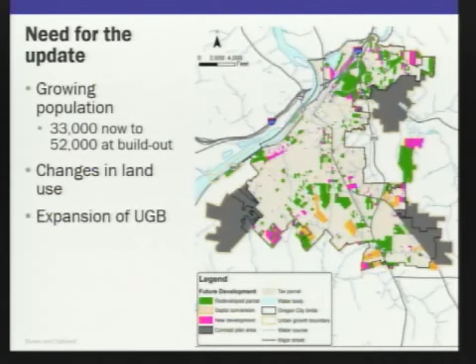So we've done a lot through the process. We did a lot of flow monitoring. We had 12 flow meters. We looked at pump station flow data at 6 of our largest pump stations. As I mentioned before, our previous model was a spreadsheet model, which was accurate, but definitely not as robust as what we have now.

We did a lot of work to calibrate that hydraulic model, and I say we, it was really Brown and Caldwell. We looked at a lot of data, a lot of maps, a lot of comp plan data, a lot of existing development data, and we incorporated all that into that model. So while most of our problems are related to wet weather, we incorporated all those features into the hydraulic model, and it's all outlined in the master plan as to how all those numbers affect some of our flows. We've got detailed cost analysis in our master plan, and we'll share some of that with you.

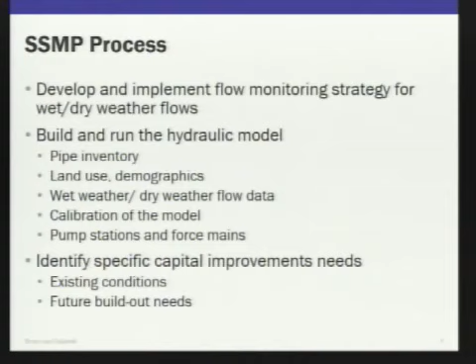And we've definitely made some assumptions based on how we should manage the program with regard to reduction of infiltration and inflow, which is rainwater that gets into the sanitary system. We are a separated system, so we've got a stormwater system that collects stormwater, and we've got a sanitary system that collects sanitary. And so we shouldn't see such high flows, but because we've got leaks in a lot of our pipes, we tend to see that inflow and infiltration make its way to the sanitary sewer system, and when that happens, it fills up, and in some cases overflows.

All right, so setting a design standard is kind of like not taking on more than you can actually accomplish. So you could set a really high design standard and then find out that the capital improvements associated with trying to reach that are much more than you can support, or you can set them relatively low. DEQ has a 5-year, 24-hour storm event, and that is the size of the storm. Really, that's 3 inches of rainfall in a 24-hour period. That's the minimum that DEQ requires us to do.

We looked at that storm, but we early on established that the 10-year, 24-hour storm event is what we should really be targeting for solutions and fixes. So we started looking strictly at the 10-year, and then we saw some of the results of that, and asked Brown and Caldwell to look at the 5-year, 24-hour storm event and see where the differences were. There weren't huge differences. But there were some differences.

We also looked at existing conditions, so where we are today, assuming no future build out, and then really the ultimate build for Oregon City is future flow conditions. We definitely don't want to underbuild our sanitary sewer system and not look to the future. So we think that's a conservative but not too conservative approach. Other communities are definitely more conservative. There are some communities that look at a larger storm event for their design of sanitary sewer system. So we don't think we're too high with that.

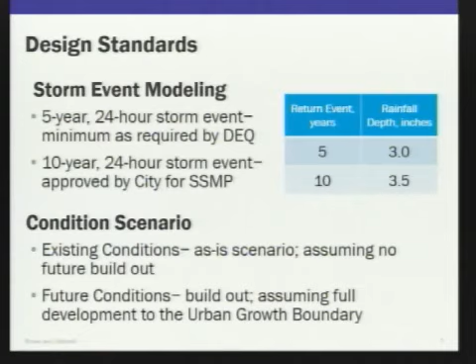Okay. I'm going to go ahead and turn this over to Jim. It says, "Don't blame the messenger," but I think we didn't really confirm that we had a problem until we hired Jim, and so I kind of wonder if maybe. So it is your fault then. Yeah, I guess it is my fault.

Well, thank you, John. So I want to start off talking about the results of the modeling, and we'll turn here to a map that shows some of the problem areas that we've found based on the 10-year future condition scenario. So again, it's the 10-year storm. That storm is what we identify as establishing the level of service.

That's what we want to provide in terms of sewer capacity for the city under that event. And it's basically twice the 1 in 5 year storm, which is the bare minimum that DEQ allows. So it's a good fit, I think, for the community.

And as John indicated, when we look at the problem areas and we looked at the 5-year storm versus the 10, there are a few more challenges or a few more problems with the 10, but really not that many. So when you build to the 10, you're really getting a lot more benefit for your dollar. Such as? Pardon me?

Such as? Well, we looked at the total numbers, the cost for doing the improvements for the 10-year event, and I think we'll show the numbers here in a few minutes, but the master plan shows for upsizing pipes, upsizing pump stations, about $5 million. And I don't have the number in my head exactly, but I think it's maybe $4 to $4.25 million if you design to the 5-year storm rather than the 10.

So for that difference, you buy a whole lot more capacity and satisfaction. We can look at the exact numbers. I don't have those with me. So let's take a look at where we see surcharging and flooding, based on that 10-year modeling.

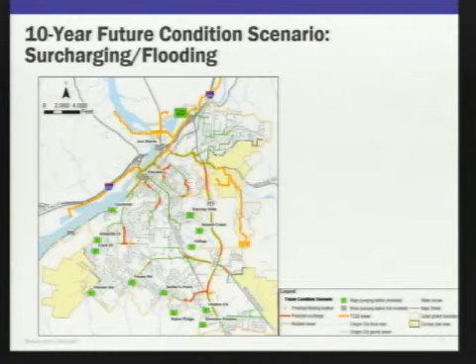Now again, this is under the future condition. This is with a full build out to the extent that's possible. So we see the flooding in a couple different areas: Hazelwood area, Linn Avenue, and down in the Settlers Division. We don't have the names on them.

Surcharging down around the Settlers Point pump station and the sewer before it connects to the Tri-City Service District sewer and Highway 213. So these are the problem areas. This next figure shows you where we've defined projects.

And if you were looking at the master plan at these two figures, because they're directly out of the master plan, you'd note that the projects are not always as large as the problem areas, because when we fix some sewers, it sometimes alleviates the upstream problem. So if we can put a bigger pipe in at a certain location, the surcharging that we were seeing upstream of that really goes away.

So this shows the northern half of the city, and you'll see again we've named some projects: the 12th Street, Linn Avenue, Division, and 13th Street, a small project up on Holcomb Boulevard, and hopefully I can say it correctly, the Canemah Pump Station upgrades there.

What you also see here are the blue lines, which we're calling sewer extensions. And these are sewers that we've identified that would need to be constructed to provide service to areas that do not currently have service. So in this case, for example, the Park Place, you see quite a few of the sewers. That would be to put sewers out into that concept area so that they could develop.

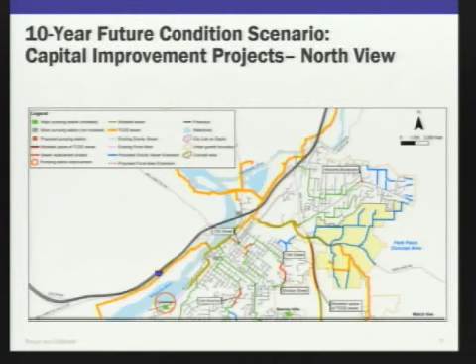And then other areas in the sewer, inside the city limits, where there just isn't sewer service currently. In some of the areas, that'll be to provide sewer service to where there are currently septic systems, because unfortunately, at some point in time, those septic systems will fail, and at that point in time, they'll need a sewer to connect to. We see more of those.

Could I stop you there a minute? Sure. And maybe you're coming to this, where we see those areas that are currently not in the urban growth boundary, the blue lines that you're indicating. I presume that future development will be taking care of some of that, but it has to be planned for. Is that right? It does need to be planned for, and in terms of who pays for it, those projects will, we've talked about how that division would be broken out, but basically they'll either be paid for through system development charges or directly by the development itself.

Remember those blue lines, because I'm going to come back to that. Okay. So those blue lines, we've got some decisions to make about how they should be funded. At least the city commission does.

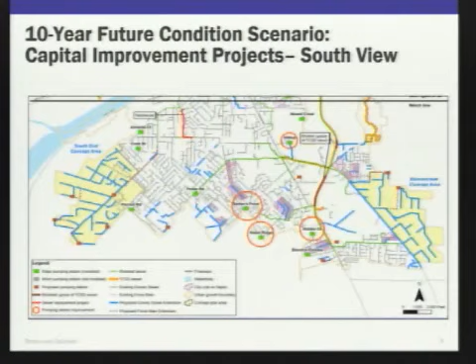Remember that. So in the southern half of the modeling in this figure, again, we have a couple projects identified. I think in a previous presentation we talked about Hazelwood, that area. And again, several more pump stations. There's 4 shown here: Hilltop, Settlers Point, Noble Ridge, and Hidden Creek, that will need upgrades so that they can convey that future flow. On this side of the city, you've got the Beaver Creek concept area as well as the South End concept area. Extensive pipe system required there, with particularly on South End the need for a number of pump stations to get the flow up out of those low areas and back up to a gravity sewer.

You can see on this side of the city that the hatched area, that's kind of a purplish hatch line, those are areas that are currently on septic, that I was mentioning earlier, that at some point in time may need to go onto the sewer system. Which ones are those? Oh, the purple? The purple lines where they're all grouped together. They're currently on septic? They're on septic systems, yes. Right there above Settlers Point's a good example of that. These here, I know. That's a lot. Yes, there are a fair number throughout the city's boundary.

Commissioner Roth? I had a question. I'm seeing these names on the map, so I'll ask it now. Areas like Noble Ridge and Settlers Point seem to be very new to be having this type of a problem. And I'm wondering, why was the development allowed the way it is, so that it needs to be upgraded? And have we done anything to change the calculations so this won't happen to us again?

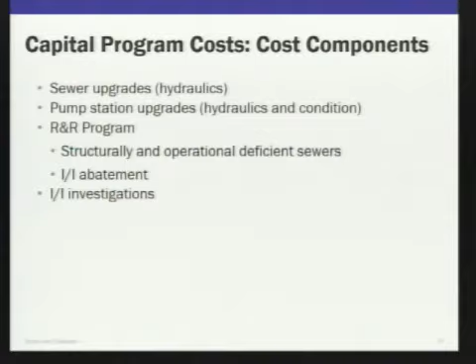Some of these sewers are not in great condition, and the city's closed-circuit television inspection program, where they go out and look at the sewers and evaluate the grade of those sewers, helps give us that information. So we have evaluated the inspection results that have been performed to date to identify a program to put money back into a capital program that will either rehabilitate or replace sanitary sewers that are structurally or operationally deficient. So you're basically reinvesting in those sewers that are starting to show their age. So that's part of the R&R program.

Another part of that, and John has also mentioned or alluded to, because of the condition of the pipes, a number of the sewers see a high amount of I&I, or inflow and infiltration, coming into them, and often I&I far overwhelms the amount of base sanitary flow that we see. We talk about wet weather and dry weather flows. Well, we often see, and our flow monitoring has shown this, that our wet weather flows can be anywhere from 5 to 8 or to 9 times the amount of the dry weather flows. And it's all from water, rainwater, groundwater getting into the sewers when they shouldn't. So the focus here as part of the R&R program is to help take care of those sewers in terms of sealing them up or repairing those sewers so we can restore hydraulic capacity back to them.

Jim, yes. In your modeling, have you identified the locations where the most significant leaks are occurring? We have, in a very, let's say, general way. We installed 12 flow meters throughout the city. And generally, we install those towards the bottom of the basins. And then in addition to what we get from the flow monitors, we had pump station data, which gave us even more information on the system. So we have a pretty good idea of where the worst basins are throughout the city.

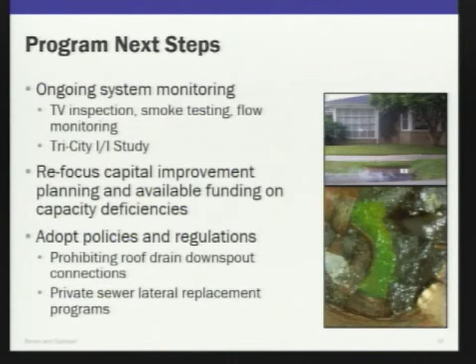We just talked about adoption of particular policies. Should we prohibit roof drains from being connected to the sanitary system? We are a separated system. We weren't always a separated system. So there are places in town where we separated the main pipes, but the private laterals, not so much. Private lateral sewer replacement program, again, we need to address that. We need to come up with those policies and regulations to figure out what the city really wants to do.

I do want to acknowledge a couple things. This master plan update, looking at rates, looking at capital programs, looking at how to allocate those costs, that's been a group effort. We've gotten a lot of support from our finance department, our community development department, Brown and Caldwell, obviously, Public Works. Our legal team is helping us now with the moratorium. This is just a very big effort.

The culmination of that comes down to the rates, and I know there's a lot of interest in, okay, so what does this mean for rates? I think, as Jim referred to, there's good news there. It could be a lot worse, but giving you a specific number is something we're going to work towards on August 12th. I think that's a work session. Yeah, work session. So I expect you all to be there for that, even though it's a city commission meeting. Even some of you planning commissioners might be interested in that.

And I mentioned our legal team. They've been helping us through the legislative approval process of this thing, and Tony and his group have been very good. So we're going to move through several planning commission and city commission meetings to get this thing adopted and in place.

So again, I mentioned that August 12th meeting. I definitely don't want to spoil the surprise there, but a couple of things that I would say is our existing rates are not really aligned with our capital needs. So, like our other utilities, we're going to share with you some of those needs. The moratorium that we're talking about and the process of implementing that puts us in a compliance schedule that front loads some of the capital costs as opposed to spreading them over time. So that'll have an impact.

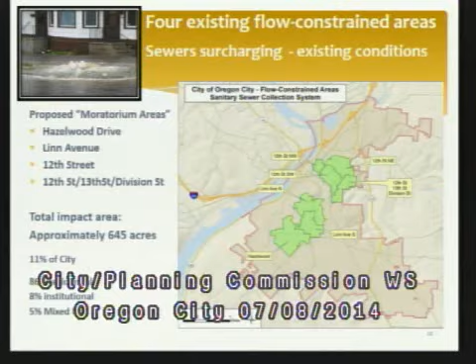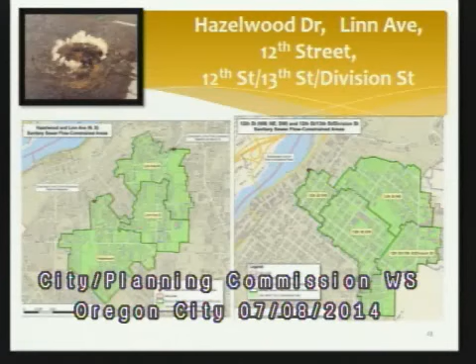Again, there's a little more detail. I know some of these are hard to read. We've got a lot of this information available online and in flyer format as well. And we'll be going over the sanitary sewer moratorium information at a couple other meetings, a meeting in July and in August. But this is all related to deficiencies during wet weather flows. Surcharging, as we've talked about, is in areas that are 5 feet or less from the ground elevation. So we know we've got some basement flooding problems in some of these areas.

If the problems aren't fixed, we're going to have spills, and that's definitely a state and federal violation. We know that the City Commission's proactive enough that they're pretty interested in seeing it resolved too, even though that's really state and federal regulation. So until the capacity problem's fixed, we're going to see surcharging and probably overflows. So we think it's a high priority. So how do we implement a fair and straightforward way? So this is our policy.

For land use applicants, we're notifying applicants that have come in. We're notifying them at the earliest opportunity that we can. We plan to process those and get them through our planning approval process. But we would leave them with a condition of approval that would say you can't really build anything until the capacity problem's been fixed. For building permits, we won't necessarily accept building applications. We're talking about a full home build, not additions like a kitchen or bathroom. We're going to let those go through, but no applications for a full home build on an existing lot.

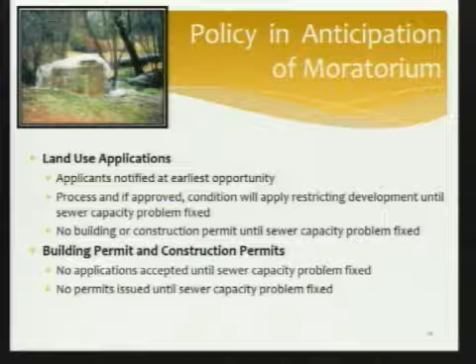No permit issued until sewer capacity. So same thing there. We just really don't want to see those building applications move forward until we fix the problem in that particular basin. One area includes the hospital, right? So will there be any restrictions on that? There will be. And so, that's the other piece about priorities. Where are our priorities as we move through the repair? It'd be nice to get those funded quickly and move forward in the most efficient way we can so we can get out from under this moratorium. So we're going to be talking a fair amount about that.

So John, one of the downsides of this is that, I know you're aware of this, land use permits have a limited shelf life. They don't last forever. So someone goes through the land use process, they have a 2-year period, we don't have the area fixed where they're in, and then what happens to their permit? It seems to me unfair that someone would have to go through the entire process all over again and pay additional fees. Yes. So I'm sure Tony has thought about this long and hard. Well, Tony and Alita and our legal team have thought about that. The way we've set up this policy is that land use approval would be held and granted until a year after the moratorium is lifted. So like a stay of some sort.

Right, like a stay of some sort. Okay. So, we definitely don't want to do that to our applicants and development community. We want to get them through. I suppose there is some risk if today's regulations change, so they've gotten approved through today's regulations, but tomorrow's change, and then they'll still have their approval. We won't necessarily go back and force them. I mean, if you don't have capacity, you don't have capacity, and there's not a whole lot you can do about that.

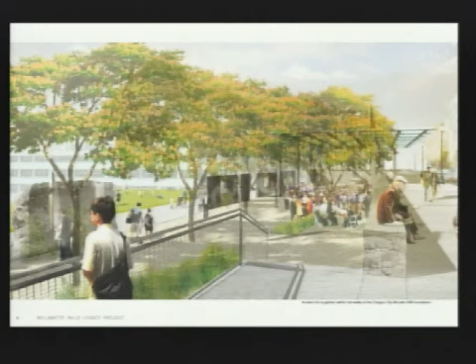Let's go ahead and fire through this. So I'm going to walk through this pretty quick. You've probably seen parts or some of these slides in presentations as we've gone through this process, and really this is a compilation of what we think is the best description of what's happened. So some of it has been brought forward from other presentations. It's really outlining the vision of what we want to see on the property, including not only the narrative component of it, but really the illustrative part of it, to try to capture what we heard from the public, what we've heard from the elected officials on what they want to see on the property.

The site characteristics, it's a very unique site. There are a lot of amenities there that we've kept hearing about should be incorporated in here, how we don't have to create this fake Main Street. We have the authentic Main Street right there. So how do these design features get incorporated into what happens there in the future, realizing that some of this is going to go away, but we can still incorporate those elements.

The 4 core values. These 4 core values have served us very well as we move through the process. Once again, just walking through what they are and the desired outcomes from those, whether it be for historical and cultural interpretation, public access, healthy habitats, and economic development. As we move through this process, the things that we've heard that we believe really represent those 4 core values. Acknowledging the work that we've done to date, beginning with preliminary investigations right after the property went bankrupt, through the master planning process, and then the partners' commitment.

It is still our goal. So like I said, these are going to move at 2 different paces. The land use document will move forward, and the strategic plan will move forward. They're not contingent upon one another, and our goal is to have the strategic plan adopted either by ordinance or resolution by all the partners to really show that commitment by each of these public agencies to this vision and the support for the direction that we're heading with it.

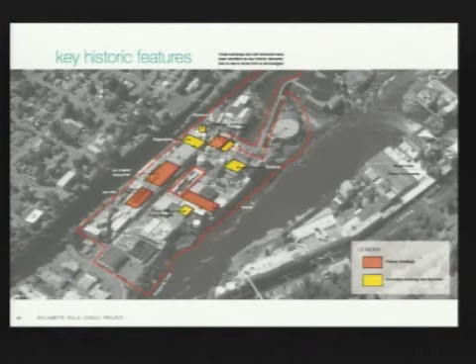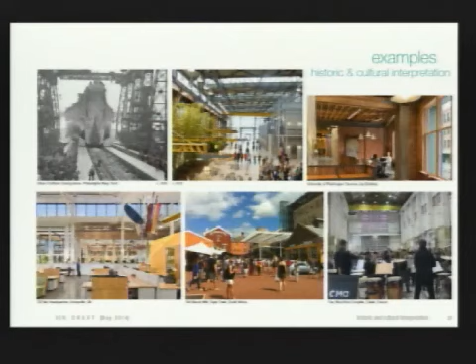There's the old flour mill foundation out there, the old basalt rock walls, the boilers, the digesters, the large sphere, Sputnik, everybody refers to when you walk through the site. So just putting those down into the strategic plan for future reference. And then some of the examples of other interpretive projects throughout the world that have been very, very successful, taking old industrial sites and incorporating them into very productive and very successful redevelopments.

The public access component, obviously one of the largest things that had the most support when we talked with the public. Getting folks back along the Willamette River and out to the falls was by far the most supported desire from the community. And as we've discussed with the partners group, the recommendation from the consultant team and the staff is that the catalytic project, the first step, we believe, should be the Riverwalk, providing that access back through the property, along the river, and out to the PGE Dam.

So we are currently negotiating, and we've been negotiating with PGE for a while. They're supportive on an access easement across the dam out to the falls, as well as we're currently negotiating with Mr. Heberling for a public access easement across the property that would get us from 99E out to the PGE Dam. We talked quite a lot about how do we access the site, the importance of not only vehicular but bike and ped access ways into the property, really integrating the site with Main Street so that it feels contiguous rather than a gated community at the end of our downtown.

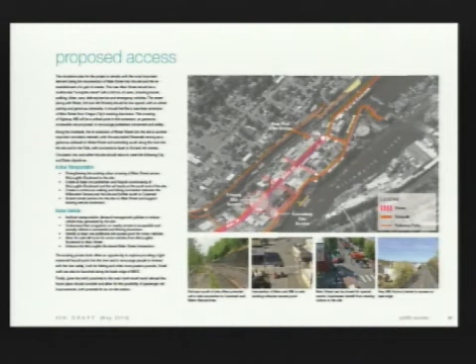And then identifying where secondary site access can occur coming off 99E into the new Water Street, as well as important ped and bike connections, both across 99E and the railroad tracks up to McLoughlin Promenade, and then continuing south along the rail spur towards Canemah and crossing 99 again to tie into the Canemah neighborhood up to the Children's Park into Canemah Bluffs, eventually down to Willamette Narrows. So it does open up significant miles of Willamette River frontage for bike and ped opportunities.

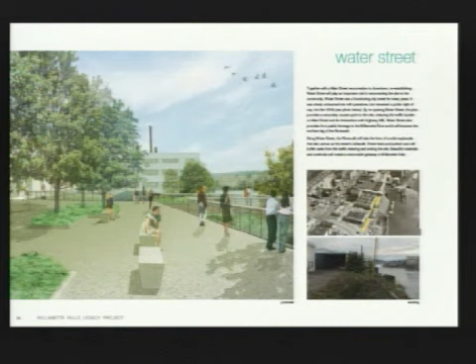Water Street, we think, is an important first step. This is coming right off 99E. We used to have Water Street there. It was platted. And so how do you reestablish that as part of the Riverwalk project? So once again, as we move through these, this is a living document. These are demonstrations. We still need to go through a public process in the final design and engineering, but this is really, we believe, capturing what we've heard as we've gone through this process so that this doesn't get lost if it does take us additional time to do this.

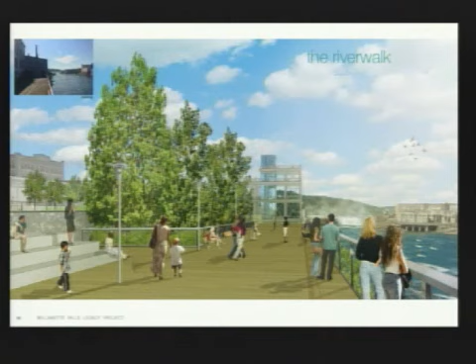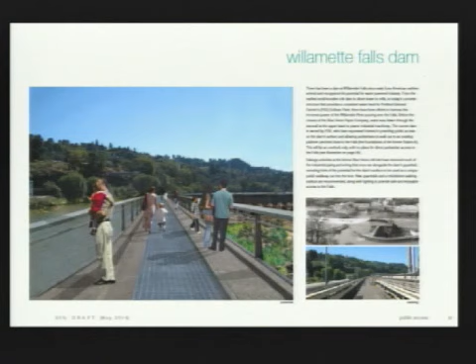And how can we incorporate, in the top of this one, you show the existing condition, and then in this example we're incorporating some of the Mill H infrastructure for public access and viewing. It's one option. It may or may not happen, but it is certainly something that could. And then out onto the PGE facility, most of you have seen this description of the public access while still incorporating the maintenance requirements of PGE to continue to operate that dam facility. Another example, many of you have seen this in Australia, of taking the old industrial oil refinery and storage tank and turning it into an absolutely beautiful public park that incorporates many of those industrial elements into its final design.

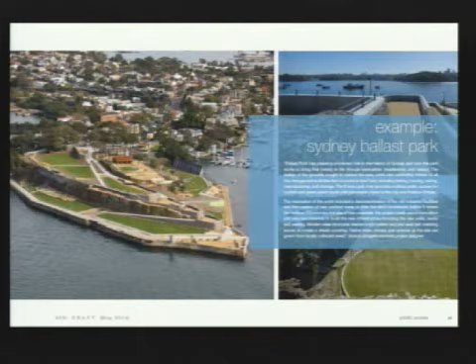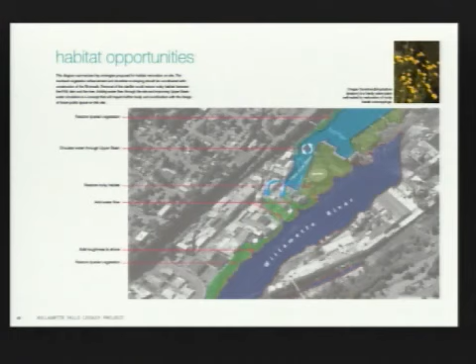The healthy habitat, you've heard a lot about the several climates that exist, the microclimates for habitat from the mist. So really focusing on riparian habitat, fish habitat, and then water quality. We see all those as opportunities with the redevelopment of this project. We've identified the areas where that can occur, both above the falls and below the falls on the site. And then the economic redevelopment potential, when we start to look at the redevelopment block. So essentially this is the one component that's going to be adopted as part of the land use document.

So in our discussion, since Mr. Heberling has purchased the property, I would like to point out block 4 on the map. So originally, we have changed this diagram in discussions with him. Originally, the yellow piece and Mill O, the Woolen Mill Foundation, used to come around almost like a little U here. Right. So if you recall out on the site, here's the PGE dam that you walk along, and then there's Mill H right here that you can walk straight into. So those foundations of Mill H are even with the dam.

And so in the discussions with Mr. Heberling it was, would there be an opportunity to potentially do something there, since it is much higher than the surrounding area. So we did propose to identify this as a potential redevelopment parcel, realizing that there is quite a bit more work that needs to go into this, as it's in the 96 inundation area, as well as ensuring that we get appropriate public access along the river out to the PGE dam. Now, there's 100 ways this can be designed, so it's not to say that development will happen here. It's saying that we will look at it in the future, because we just don't know right now what the opportunities are there. So that is the one change that we have made.

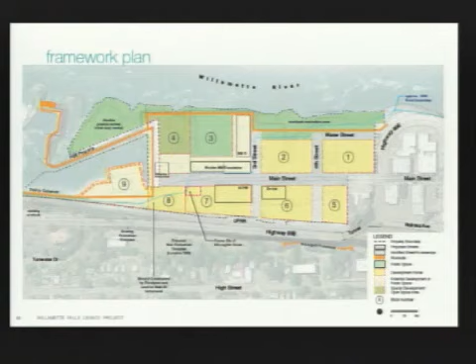And if you recall, with the discussions we've had about this, in this hatched area where Mill O is and the Woolen Mill Foundation, it always was this hatched because it's right on that edge of being in the 96 flood, but then transitioning into what we know is where the private development should occur. And so we've always said we need to take a closer look at this. So we've just expanded that for the

lot 4 there. The demonstration plans, so you've seen several of these showing from taking most of the infrastructure out to leaving a lot of the infrastructure in place, but really emphasizing that there's always a way to provide public access through the site out to the falls and then continuing south down to Canemah. We're considering preparing a demonstration plan D, which would show that option that I just described on lot 4, of what that could look like. So we are planning to potentially add a demonstration plan D.

Here we talk about some of the initial work we've done on the opportunities for economic investment in the property, as well as the potential jobs and tax revenue generated through a full redevelopment of the site. We've got several scenarios and assumptions that we had to make in order to come up with our numbers. So this is the justification for what we assumed, both for the economic impact for tax revenue, jobs created, as well as trips generated from the site. So all that methodology and thought process is there for anyone to look at.

And then realizing the vision for the property. So we talked a little bit about not only acknowledging what we've done to date, but we've taken and then extended out in the public access, the infrastructure, the public spaces, and the redevelopment. And this is going to be an ongoing effort. We didn't want to get into a situation where we said public access had to come first or infrastructure had to come second. Some of this will happen concurrently. Some of it will require us to identify funding and plans, but we'll have to wait until the private side's ready to go. So we didn't want to insinuate that you had to do one before you could start the other. All 4 of these are probably going to be moving along at different paces.

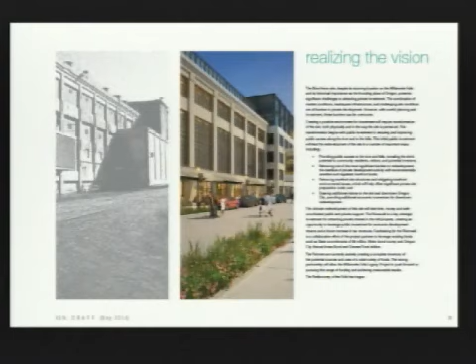So once again, that was very quick. I know you have seen most of this. A couple of things I do need to talk about. We currently have another Hatfield Fellow that's working with us on the project. Metro was able to get them involved, and they're looking at best practices for starting a friends group on the property. We see a nonprofit part of this as very important. It could help us very much in raising funds, being the pass-through on projects for grants if we need a nonprofit to serve that role.

So as we've sent out questionnaires, a survey to folks, you may see that pop across your email. So that's what we're trying to accomplish there, is to get an understanding of how would we form this, how could it function, what would folks be interested in, so that we can start setting that up to get that going sooner rather than later.

We are also working on a Riverwalk memorandum of understanding between all the local agencies. Essentially what we're trying to identify is, what are the goals of the Riverwalk, so that when we start to go and negotiate those, there's no surprises in the end. Essentially we want agreement among the public agencies, one acknowledging that the Riverwalk first is the right step, that the catalytic value of it is worth investing in.